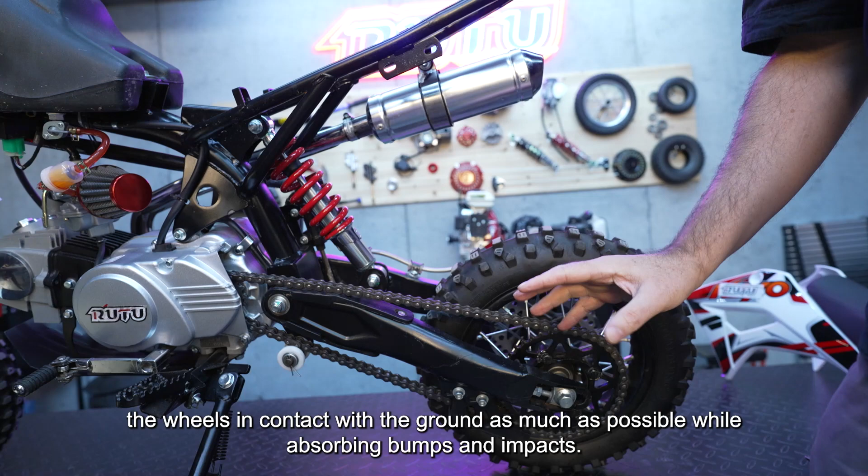The suspension of a dirt bike, ATV, or off-road vehicle like this is basically shock absorbers. Their job is to maintain the bike's control on the road by keeping the wheels in contact with the ground as much as possible, while absorbing bumps and impacts. This makes your ride comfortable and allows you to maintain control and traction.

A shock absorber is made up of two primary parts: the spring, or coil spring, and the damper. The spring provides resistance to force pushing the wheel up and pushes the wheel back down to maintain contact with the ground, which helps you maintain traction.

But springs can expand and contract violently and quickly. Think of a slinky, the kid's toy that you can spring in and out quickly. Also, the thicker the spring is, the higher the load capacity, and the more windings you have in the spring. A spring is rated by how many pounds of force, or kilos if using metric, it can absorb to compress - for example, up to 400 pounds to compress by 1 inch.

The second major part of the shock absorber is the damper. That's the part that really absorbs not only shock in the spring, but helps control the spring's action. The word is damper, not dampener - I've confused these words before myself. There are two types we're going to talk about.

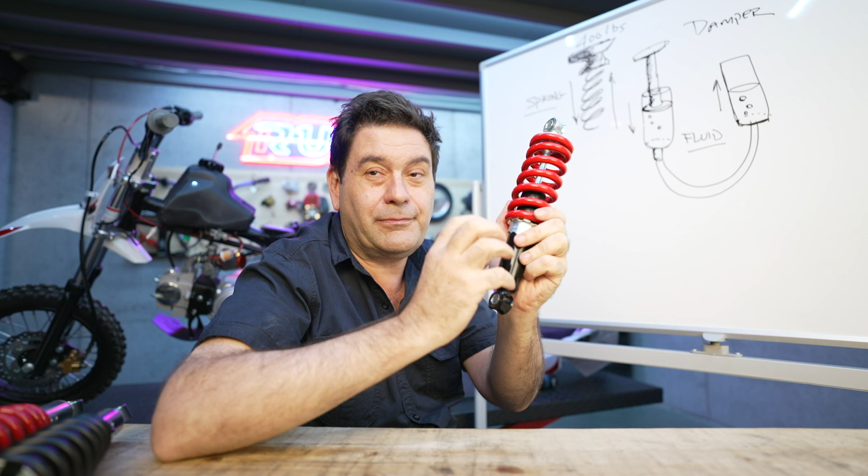This one is an oil damper. Inside there is a certain volume of oil, and it absorbs energy and controls the speed of the compression of the spring. You can vary this compression a couple of ways. One is using a higher viscosity or thicker oil - the thicker it is, the slower the oil will move inside this area. The second is to vary the volume of this space. Some shocks have dials and controls that let you lock off parts of this trapped space for the oil to move, which varies the damping rate.

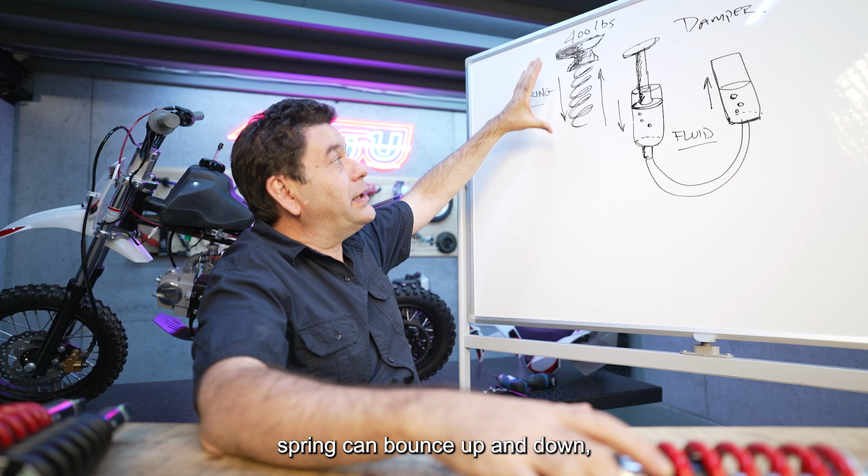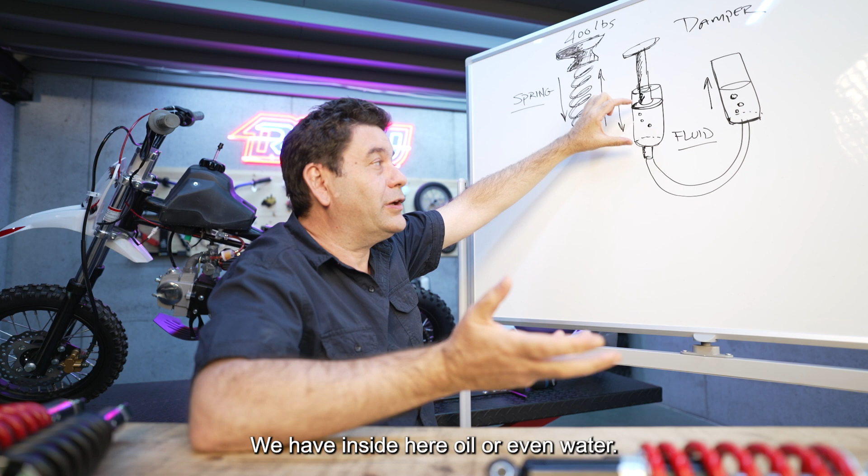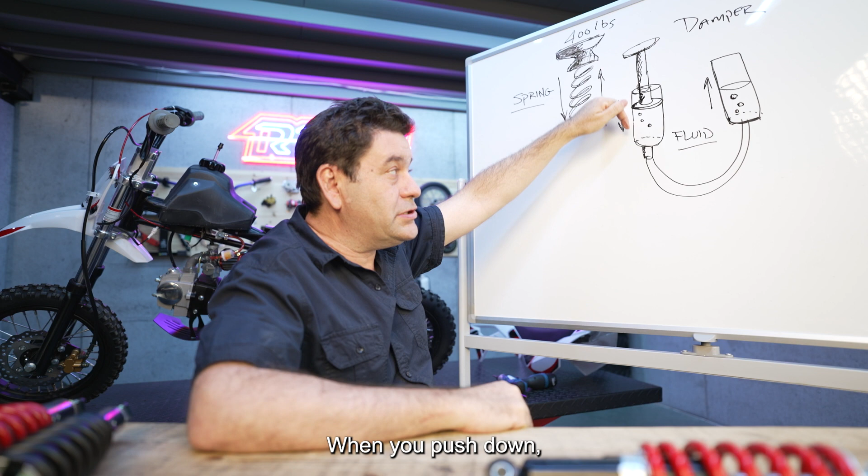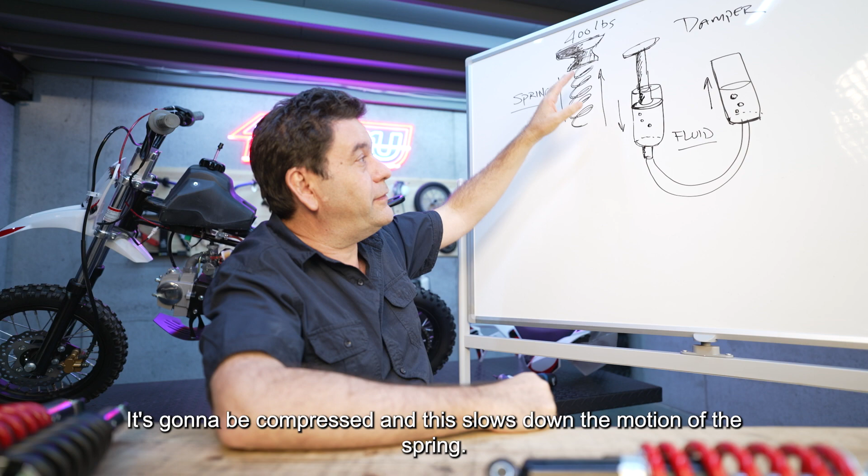You can think of it like this picture. First, we had the spring - it can bounce up and down, but there's nothing really controlling it. But if we have a plunger, like a big syringe, with oil or water trapped inside, and a second syringe connected by a tube - when you push down, the fluid has to go somewhere, and it ends up over here. If this is sealed off, it gets compressed and slows down the motion of the spring. If you open up a bigger area, you get more motion of the spring. So that's your variable damping.

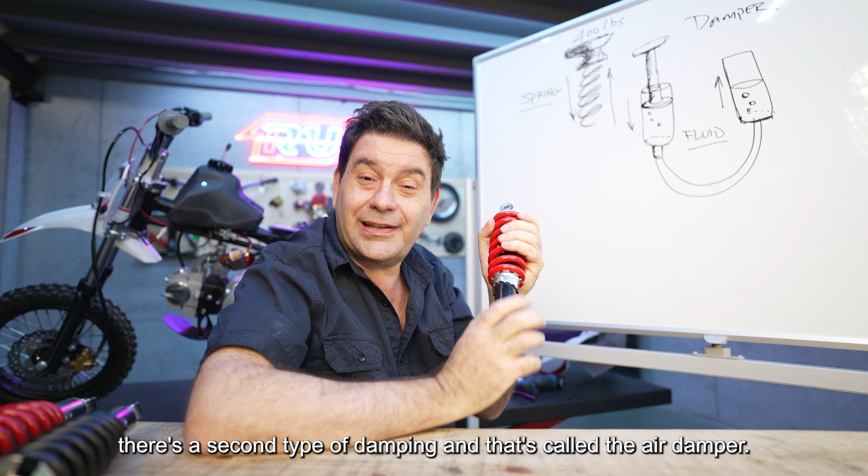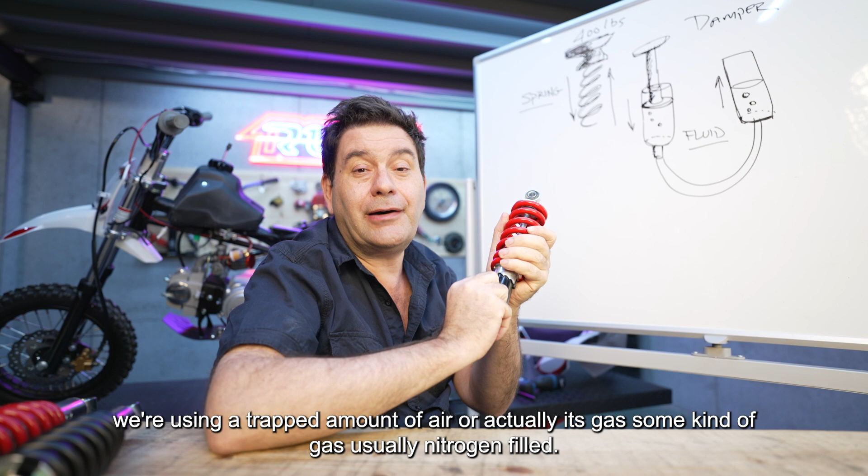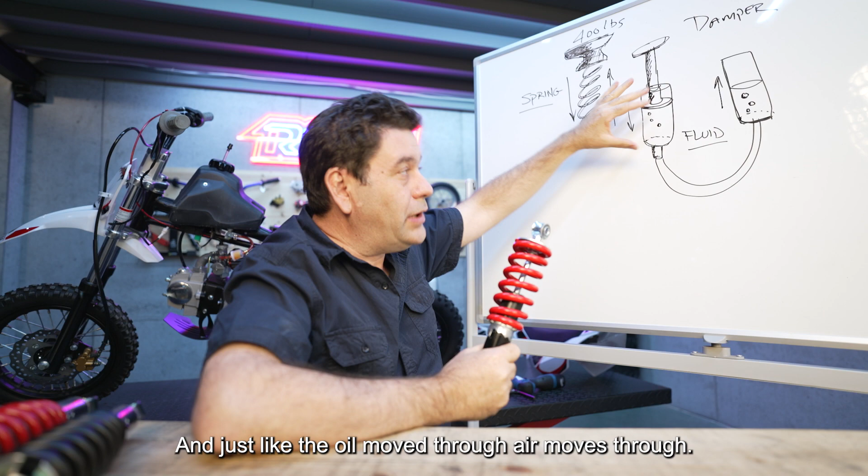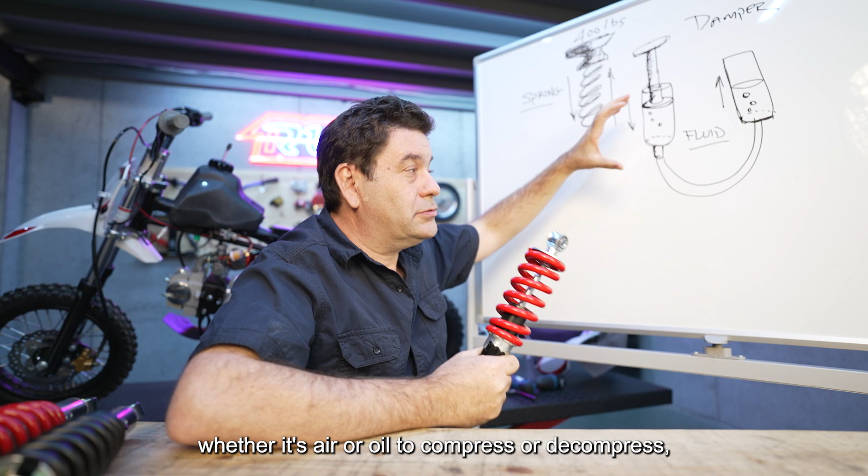There's a second type of damping called the air damper. It basically works the same way, but instead of oil or hydraulic fluid, we're using a trapped amount of air, or actually gas - usually nitrogen filled. There's a trapped amount of air inside this chamber, and just like the oil moved through, air moves through. It's the same way big excavators and diggers work with hydraulics - using a certain amount of fluid, whether air or oil, to compress or decompress. Generally, oil is a little more controlled.

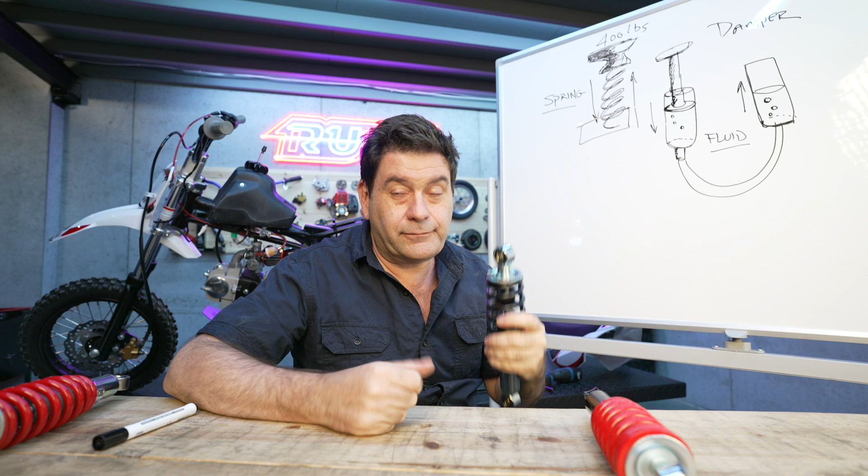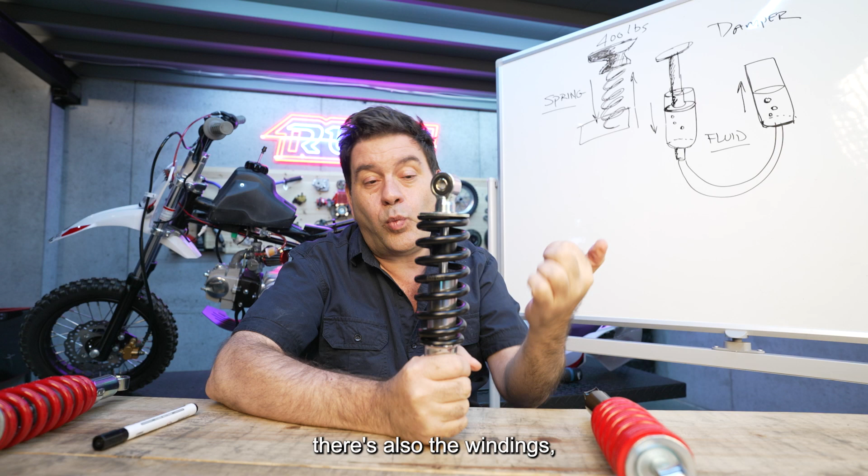So we had the spring itself and the damper - let's talk about materials. For the spring, there's the quality of steel, the windings - how many windings - and even the thickness of each coil. This one here is about 9 millimeters; some are thinner, some are thicker. The thickness and winding give you more resistance in the spring rate. Some springs have a dial that can tighten down the total spring travel - that's called adjustable spring rate.

Then we look at the materials - even this part here, called the head cover, and the spring seat. This is good solid steel construction, chrome plated, so it holds up against wear and corrosion. There's also this rubber bushing here. So even in the materials and the way they're built, this is a superior shock compared to others.

I'll show you here - these two, you see one has a longer coil than the other. There are two parts to that: one is about the spacing on the bike, and second, this has a thicker coil and this has a thinner coil. They're probably rated the same because the thicker one has more resistance, but the longer one provides similar resistance through its length. It's technical, but in the end, you're probably achieving the same goal.